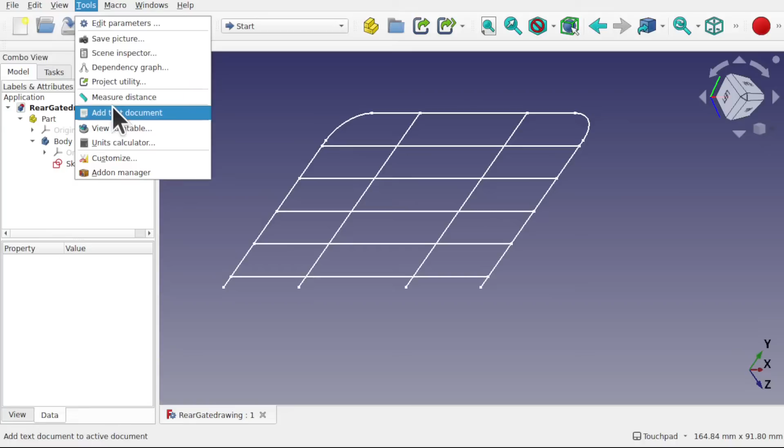One thing I'm going to do is take this, because I'm going to pick out some key points from this email. And I've got the file already open. So this is a file from the Patreon. And one thing good about FreeCAD is you can go Tools, Add Text Document. And this keeps the text document with the file, so you could put your design intent here, some project notes, etc.

So what I'm going to do is look through, and we're going to remove the background and focus on the key points. So we've got 2mm pipe all around. This one I feel is quite important as well, and there's a reason for that, because I've looked over to the left and I've noticed we've got this in here, a part. I'll come to that in a minute.

So we like to 3D print as usual. The frame is made from, so I'm going to take that as well, another design intent. And we'll take this one as well. And from that, we've got some notes here. So we can save that as well. Just save that off, we can rename that as well. So this is a design intent, so I just rename that to design intent, but we can leave it for the moment.

Now going back to the part, it's quite interesting because at the moment we've got no padding or piping in here, and it's a part design. So we've got a body here, which is a part design object. If I double click on that, we go straight to the part design. The interesting thing is this part here.

Now, I don't like making assumptions. That might be there for a reason. There's normally no reason to place a part, then a body inside, but it does create a separate container that you can do things with.

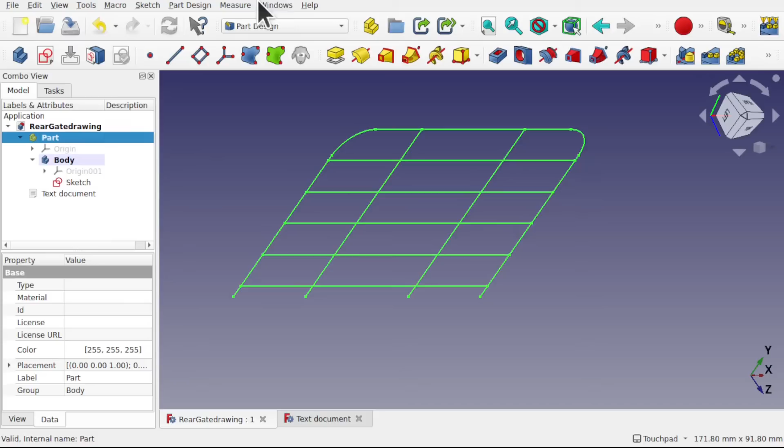For instance, let's come over to the draft workbench. Now, if you're into your laser cutting or actually multiple 3D prints, so laying out multiple 3D prints, and say, well, from our design intent, we can see here we've got, I use this as a technical drawing template to make rear and front gates on trailer.

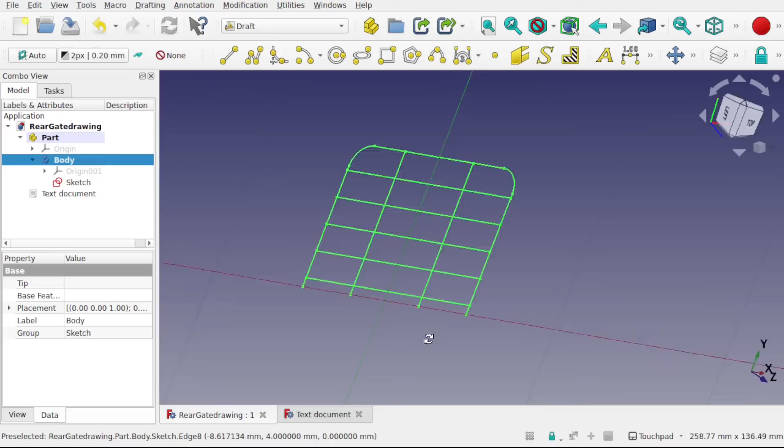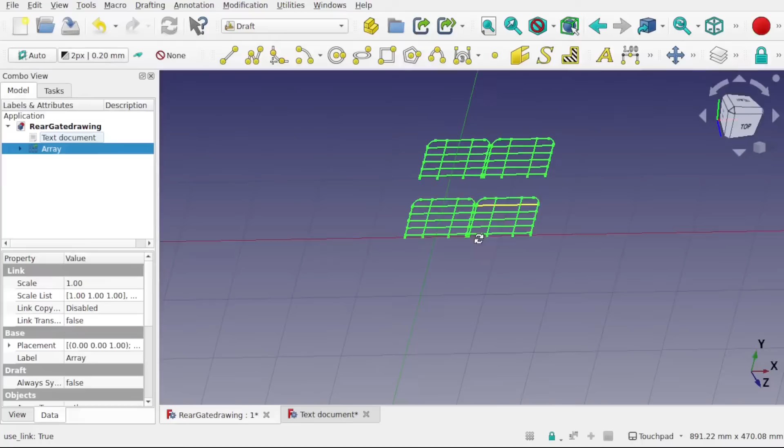Well, we may want to print this twice. So rather than duplicating up in your slicer or some other program, what we can do is click on that part, come to modifications, come up to array tools and array. Let's go by 2 on the X, 2 on the Y, and OK that. And we get an array of that body, so inside that body we've got array of the part.

So you can do things like that with the part container. This part container lives here, and it's available from this toolbar on all projects, so it has some use in that area. Also, let's just delete that.

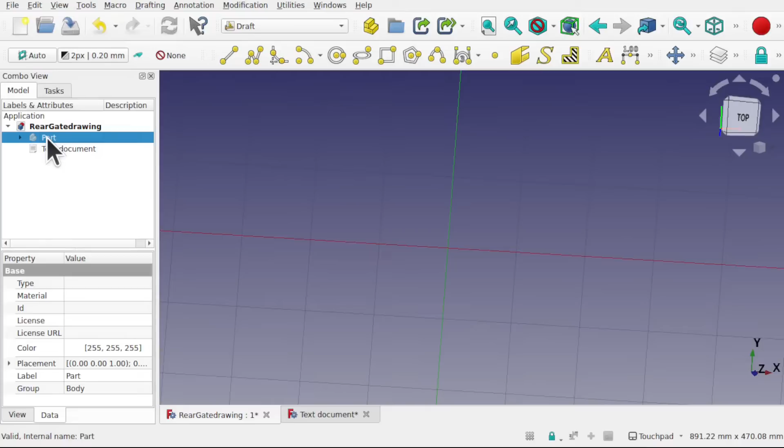And bring back the part. Let's come out, turn off the gridding, and center our view. So let's make sure that's visible. There we go.

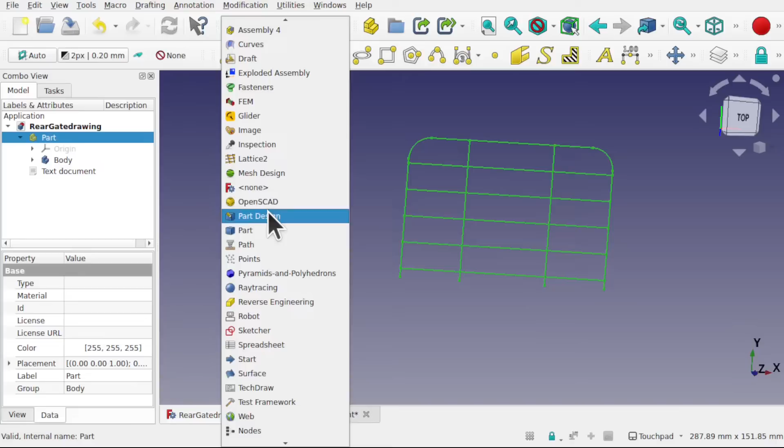This acts as another way of transforming. So we can transform this, and inside we have the body. So we can have multiple bodies in here over in the part design. So we have a new body, a new sketch, and I'm going to go along the XY plane and OK that. So now we've got two bodies in here.

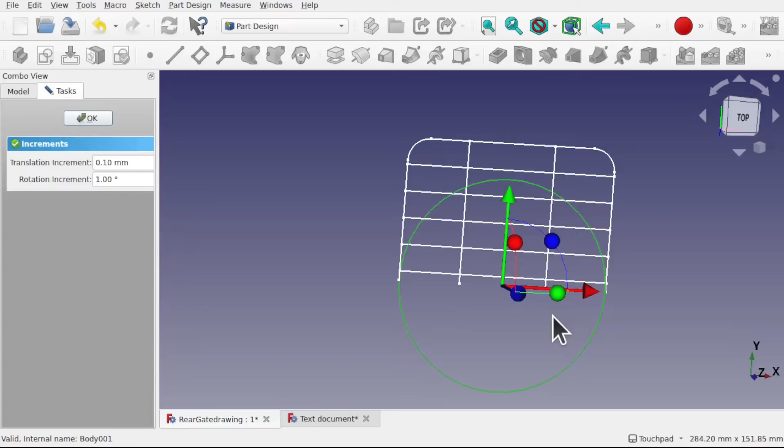So if I create a circle in here, they're going to be on top of each other. And I'll transform that body, right click, transform this over to the right. Let's zoom out a bit. Might have done this a bit big. And OK, so we've got these two bodies here, body and body 001.

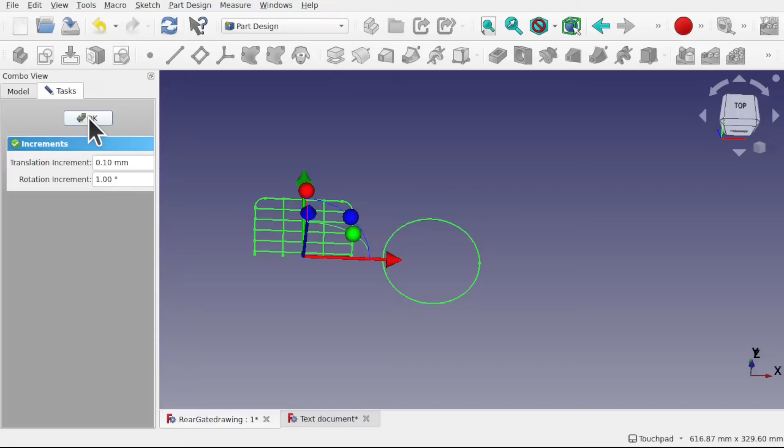That means if I click on this part and right click transform, I transform those as one. So it's a container to place extra containers in, and you can nest them in there. So that might be there as a design intent. If it's not, what we can just do is delete that, and it's saying delete contents as well. We can just hit no.

So for the time being I'm assuming that it's not there for design intent, but if it is, we can just add it in. I don't like assuming, but we're just going to assume that for the time being. So we have a body, we have a sketch. Now let's have a look at the sketch and see what's inside.

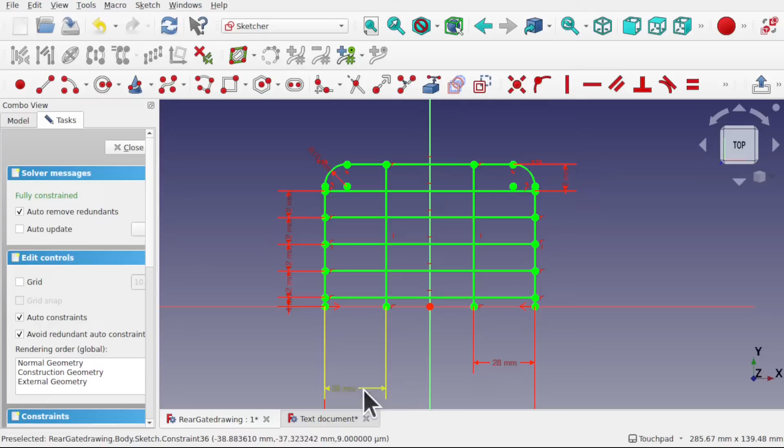So we have a basic sketch in here. We've got a number of constraints to place this 12mm apart. What I'm looking at is, if we look at the sketch, we have symmetry across here. And we can see all of these are the same going along here. So we could save ourselves some time by sketching only half this side.

But looking at the design intent, there's this bit about the technical drawing. So if I was using this technical drawing, we can actually use sketches in technical drawings. So let's come over to the TechDraw.

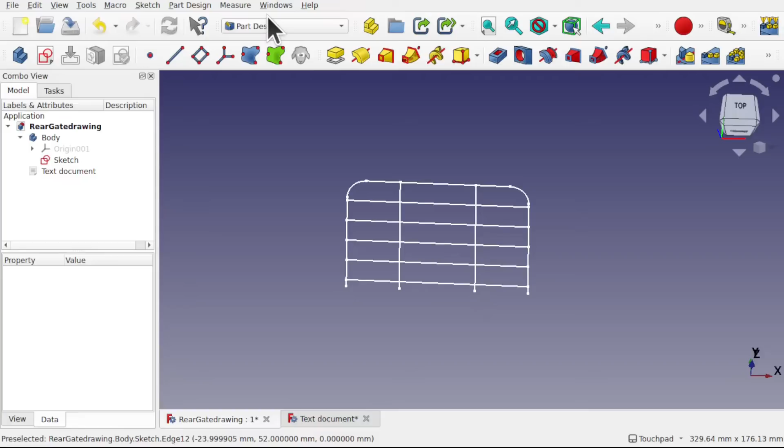So this is where you have to be careful with symmetry. If I was only doing one side, we would have to do something extra with the technical drawing. Let's go to TechDraw, and we'll create a new technical drawing document. Not worried about the pages at the moment, or what we're using for the template.

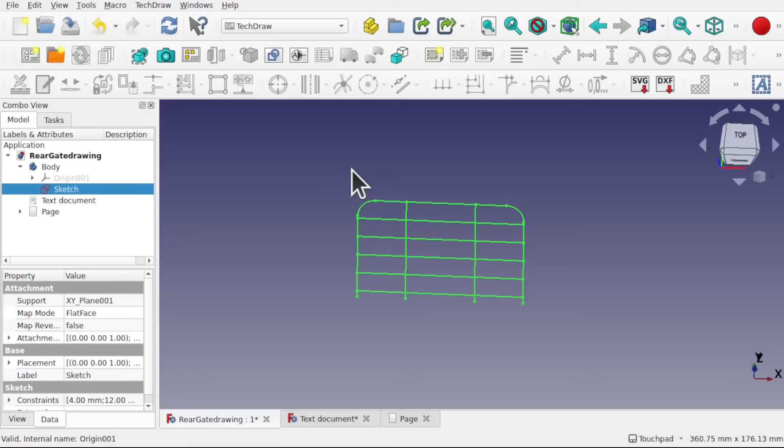And what we do is click on the sketch, so we select what we want in the technical drawing. Make sure our view is nicely placed, and we use this button here, insert view, or TechDraw insert view. That inserts this view into the technical drawing. So when I come down to the page, you can see we've got this in here.

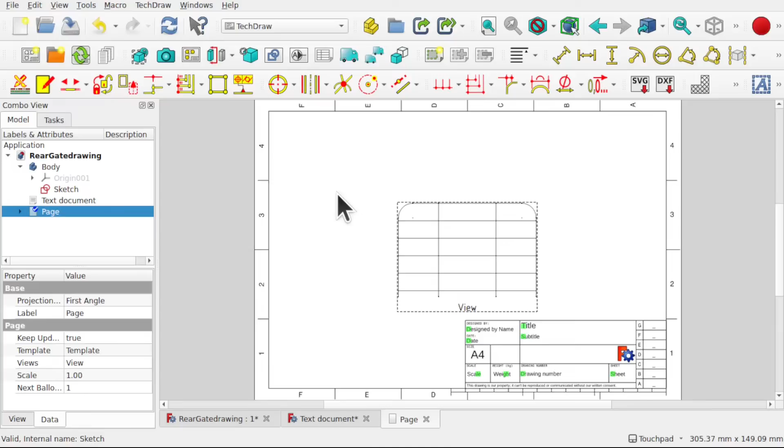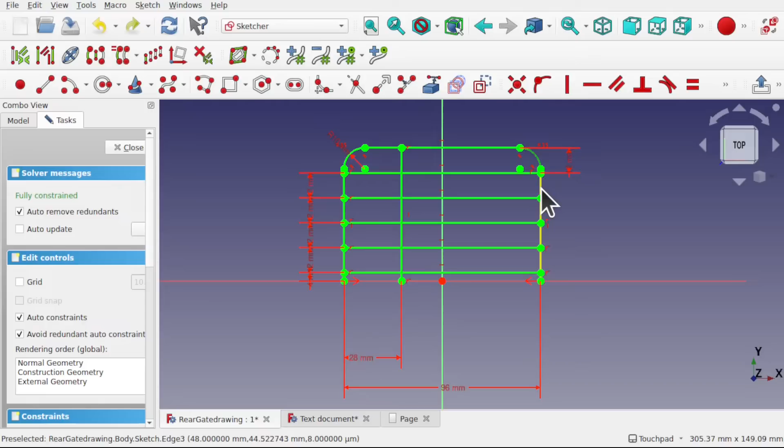If we was doing this with symmetry, let's come back into here and just delete that. If we was doing this with symmetry, then we have to be careful, because obviously if I come into here and let's just delete this one, and we'll delete these sides as well. So let's take these, select those two and delete. And we'll bring these back onto this line with a point on object constraint.

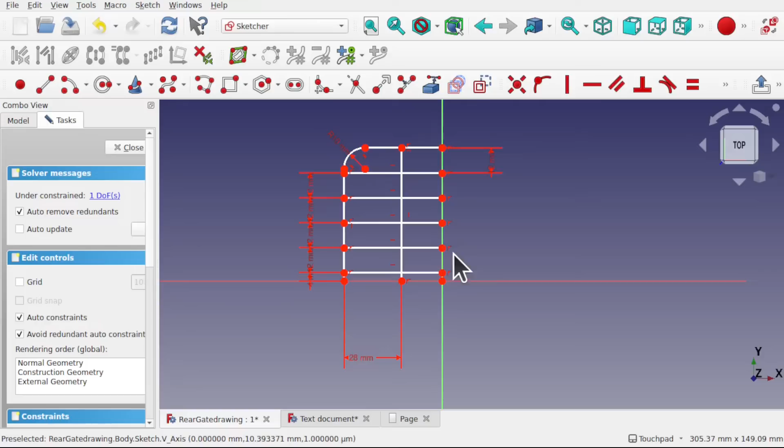So we can multi-select these. Select 3 of them, 3 points, and click on this line, point on line constraint. So it takes all those 3 and places them on the line. We've got that there, but it's obviously not fully locked down as of yet.

So we can take a length in here, place a length constraint, 20mm. Okay, we've got some additional constraints in here, so we've got this 12mm going all the way up here. These are all the same, so I'm just going to delete these, leaving one, and then take this one here.

Now I see that's a single line. So what we can do to save our constraints, we can change that into a polyline. How's that constraint in there? Okay, that's good. So I'm going to delete this 12mm, remember that, and also we want the 4mm there.

So I'm going to sketch by the side of it. Come into the polyline and we'll place one there. The polyline will allow us to do what we've got in here. It just neatens up the sketch a little bit. So we've got those in there.

So we want the 12mm, this one's 12mm. And we'll make all these equal, so selecting them all, making that equal. And also we've got the 4mm here, and we'll set this one to 4mm as well.

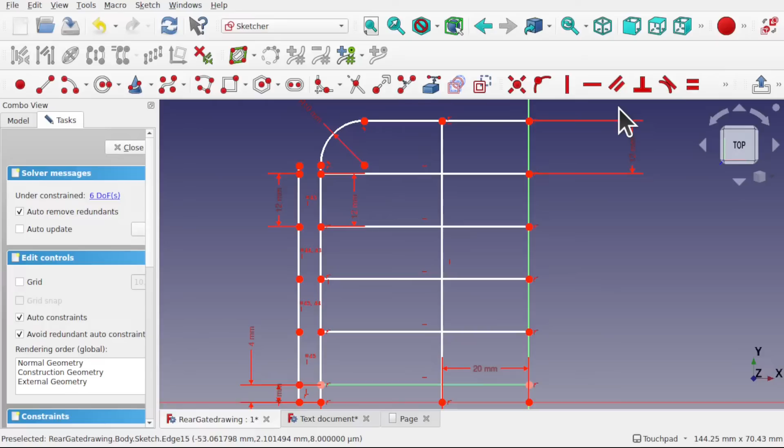Therefore we can delete this. Let's first have a look, see what distance. So this is 28mm, so we must remember that. Because when we delete this one and connect up these constraints, this should be on the line, point on line constraint. Some redundant constraints there, let's delete that. Might have already been on that line.

And these need to be coincident. We can't do multiple coincident constraints, unfortunately, so I'm going to use that. I'm going to actually speed this up by taking these two and pressing C on the keyboard for coincident. Just connects those up. Finding these two, and then placing, I believe it was 28 millimeters there.

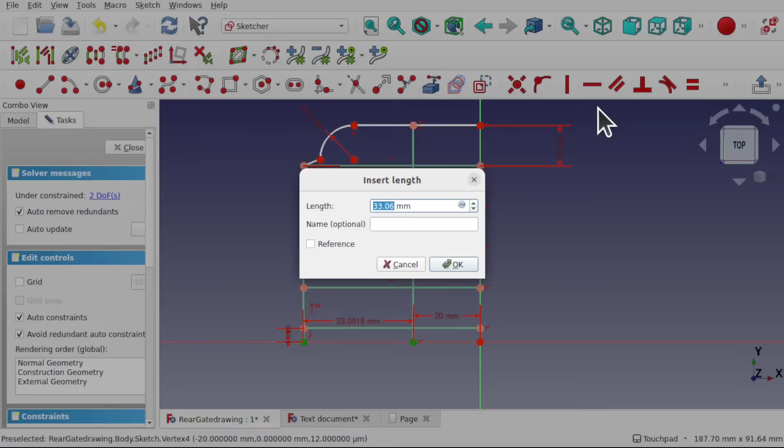We've got some constraints still to sort up here, which means that this one just needs a vertical constraint. And I've missed the length in here, not sure what that was. Let's just place that in there, of 2mm. There we go. So we've got that there, all constrained down, all ready to go.

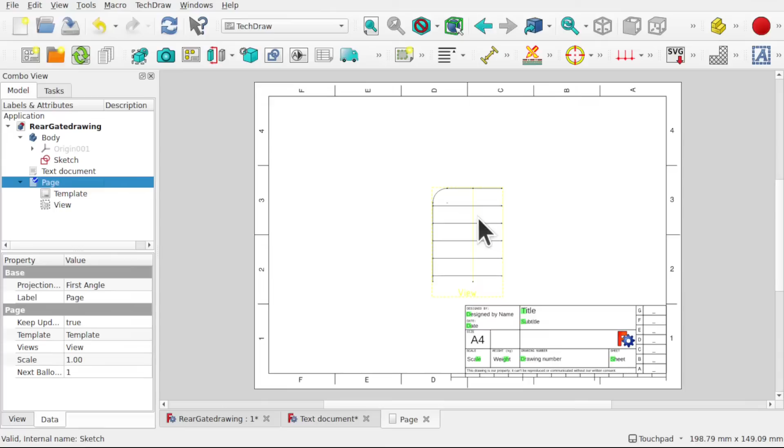When we go back to saying we want this in a technical drawing, then obviously we haven't got the other side. So when we add that with our insert view, we only get one side. But we can solve that. So let's delete that view and come back to the body. I realise I haven't actually answered any of the questions yet—this is just some background.

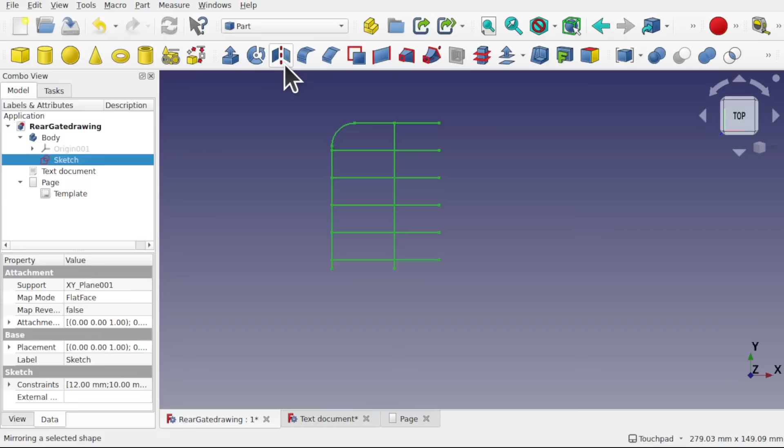In the part, we can mirror sketches as well. So I could mirror this sketch using the mirror. I know it's a part design workflow we're doing this with. We can still jump into the part and have parts using the part workbench, and have those separate from the part design. So we'll mirror that over the YZ plane and okay that, so it's mirrored over the other side.

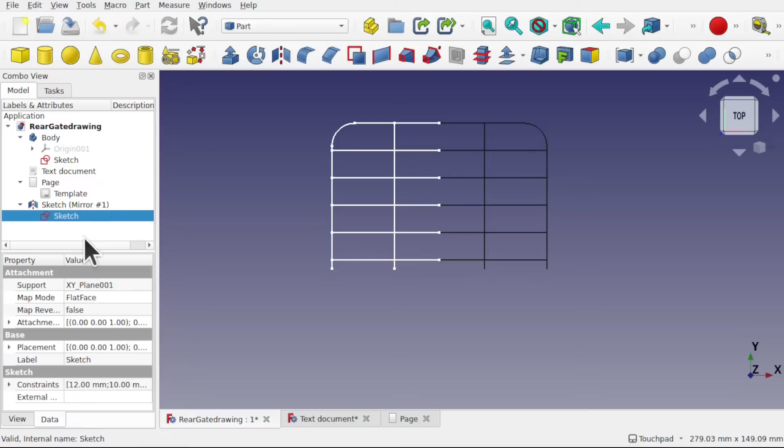When I select both of those, so we've got in here, we've got the sketch. If I click on this, this is actually this sketch here. So if I press the spacebar in here, the other one disappears as well. So these are linked. So if I control click both of those, first of all, we'll go into the TechDraw and then do insert view.

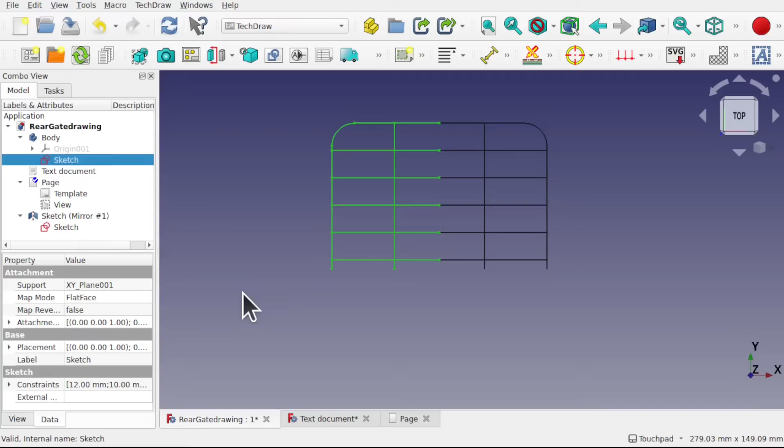If we look at our page, we get both sides actually inserted into that view. Anything that happens to this sketch, because they're linked, will get reflected in the mirror. So we have that option there. That means that I can come in and just hide the sketch mirror and work with this body up here. So we've got the separate mirror for our technical drawing if we want to keep that gate inside our page.

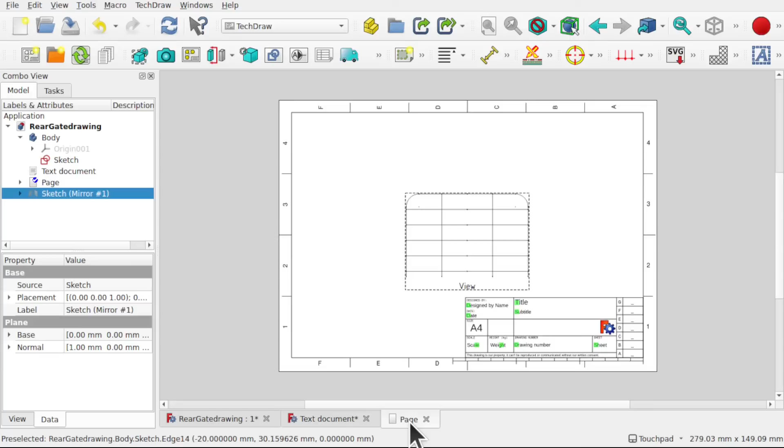So going back to the question, let's come back to the part design. First things first is make sure that that body, right click, toggle active body. If it's not bold, it's not active, so we need an active body. I need to place a profile to sweep around here.

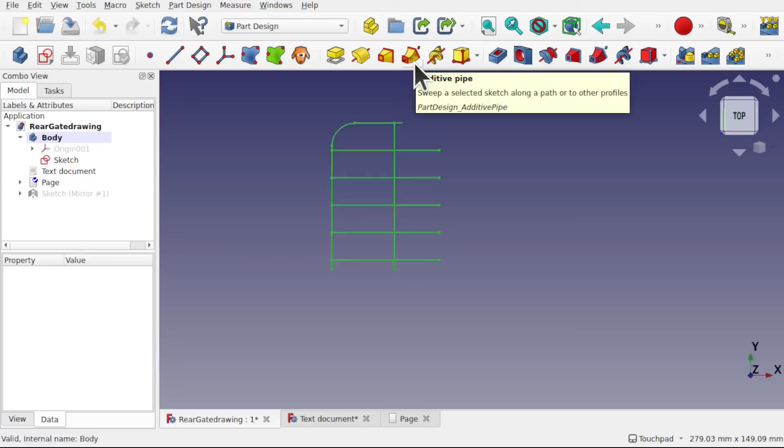Now we're going to use something called the Additive Pipe. So going back to our design intent, we've got frames made up from 2mm pipe. So straight away we can relate to what's in the part design for the Additive Pipe.

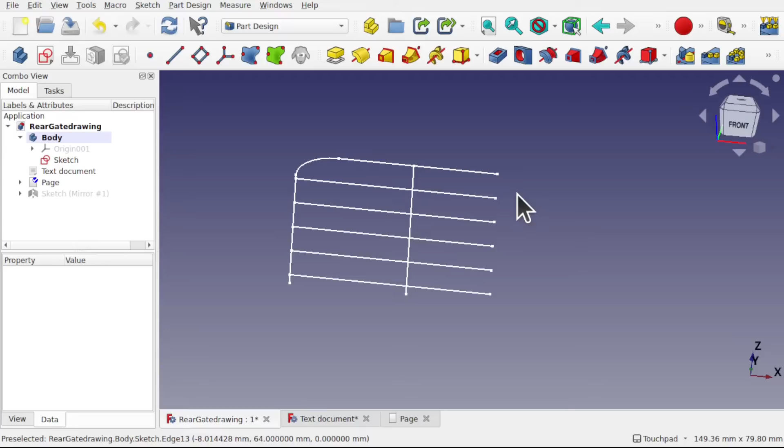Best idea with this is to use an attach mode called Translate Origin. This allows me to target these vertices. So we go around to our front and create our initial sketch. Make sure nothing's selected and create a sketch, looking along the XZ plane. Come down to XZ and OK. Now this will place me in the right position, so I want to place a pipe around this part first. Let's go for a circle and create a circle.

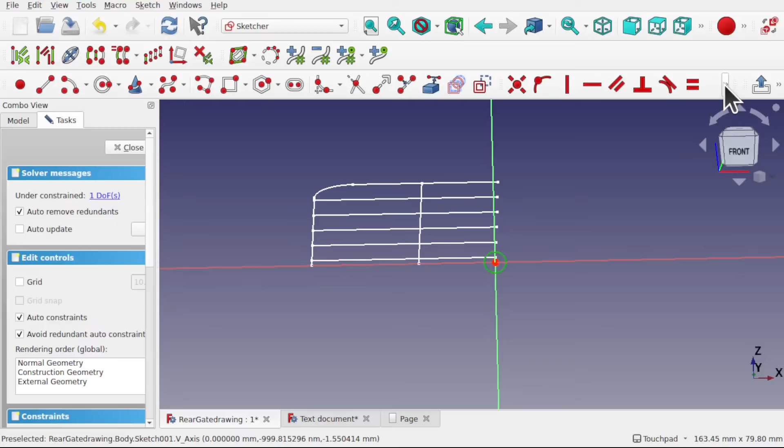Now this was 2mm, wasn't it? So we take the circle and come up - I've cranked the size of the icons up just to make it easier for people to see - and we'll set a diameter of 2mm. This profile can be whatever you want, so we could make a square for a square pipe, but we're just going to go for a circle for this one. I'm not sure what piping we want around here, but this profile can be changed. Now let's close that.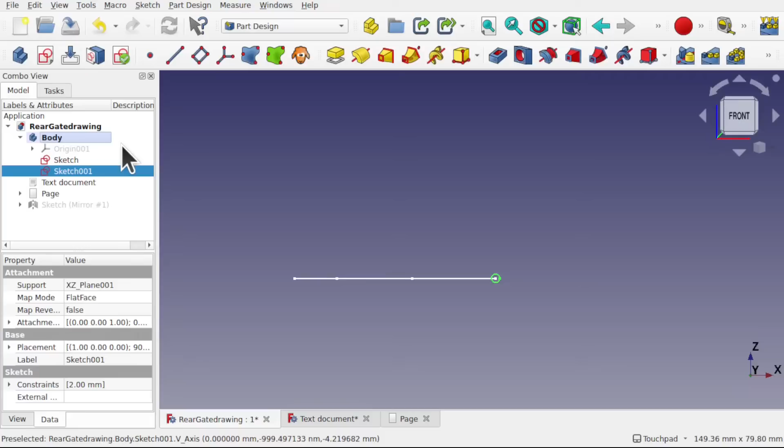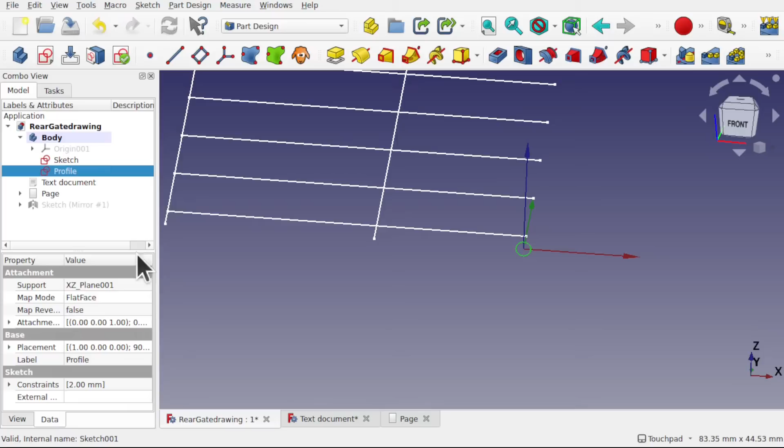At the moment the circle sits in the middle of the origin here. So if I come up to view, toggle axis cross, you can see how it sits there. This is where sketch attach mode comes in handy. So we'll take the profile, which is this one here, and just do a quick rename on that for profile. We can see the support is the XZ plane and map mode is flat face.

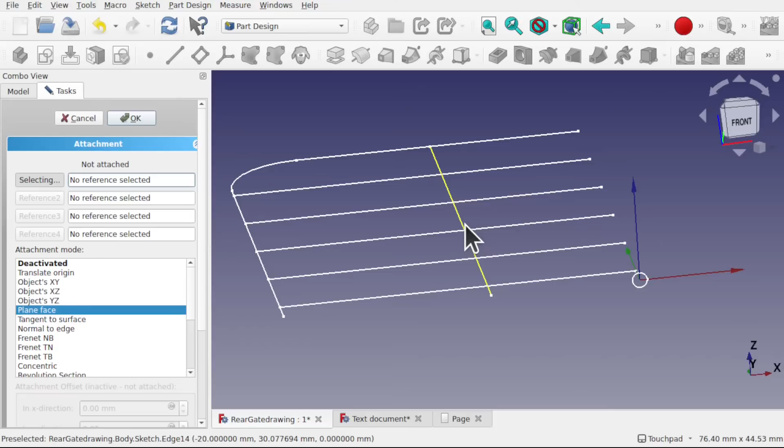So we click on that and we can see our attachment modes. Let's move our screen over here. I'm going to click on plane, make sure it's saying selecting. We'll remove the contents so we've got nothing in there. The profile is projected this way, so it's sitting pointing across. That means we can use the selecting option and select this vertex, which moves that profile to that vertex, ready for the sweep or the additive pipe.

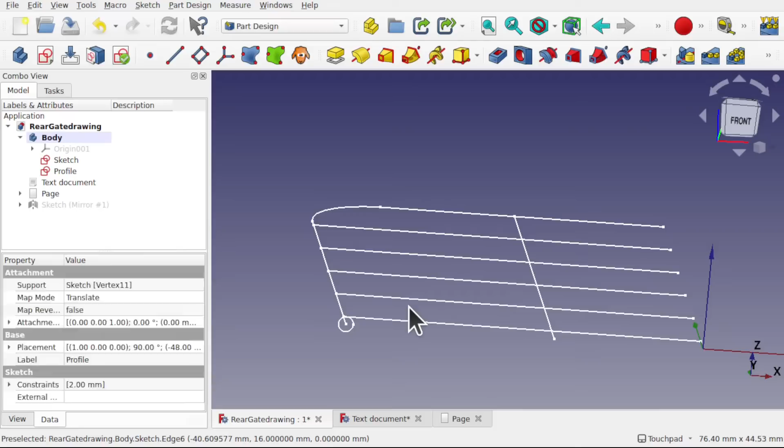So now we've got the profile in position. I had a tick on, so I just went Edit, Refresh, or Control R on Linux - it's different on Windows or Mac. So we've got our profile ready.

What we need to do now is use a sweep. So Part Design, create an additive feature, and it's the additive pipe - this one here. The first thing it wants is to select a feature that we want to do; this is going to be the profile. So we'll select the profile and OK that.

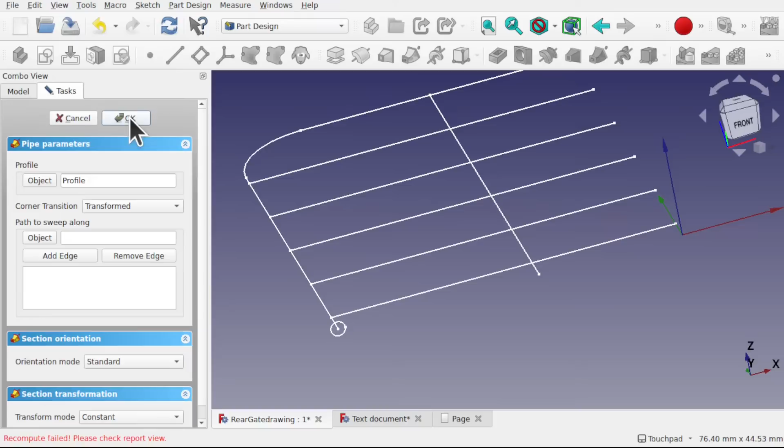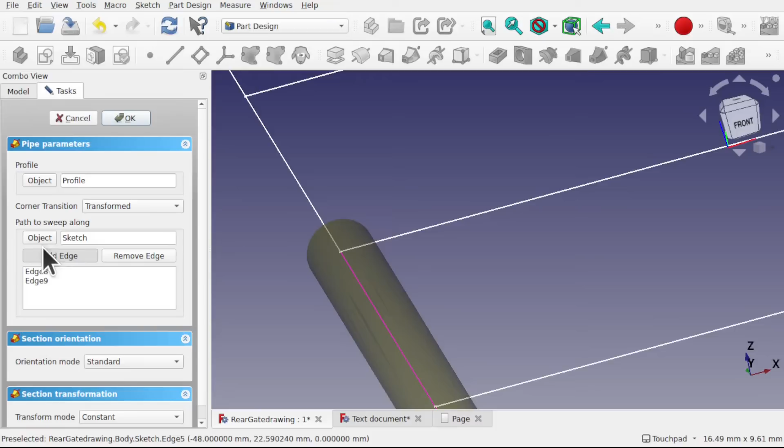Now we need to add the edges. So click add edge and click the edges. These are going to be the individual edges here. So we'll select this one, and then we have to hit add edge again, unfortunately, and select this one. Unless it's changed, let's select one again. No - so add edge, and what we're doing is moving along, adding those edges.

And we create this pipe that runs all the way through. Now be careful here - I'm just going to zoom out a bit and bring this around. And if I highlight that line, I can use my zoom and it will target that into the center. There we go. So add edge again.

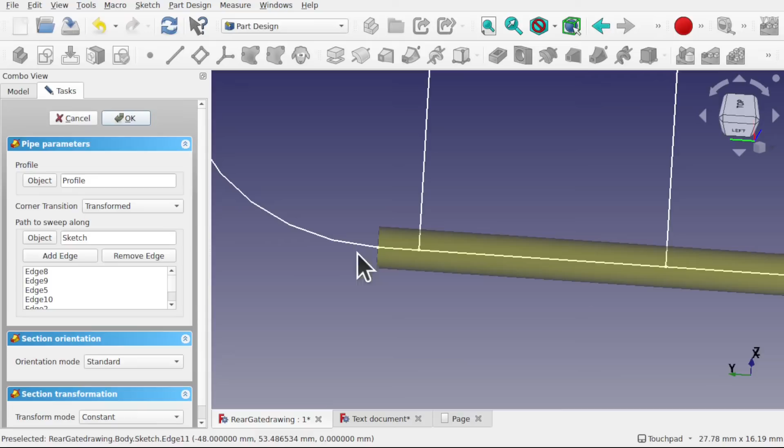And we shouldn't have any transition problems - it should go nicely around there because we've got a nice curve there. And we'll add an edge again there. So we've got the first part of our pipe that goes around the outside. That's okay, that - so we've got that one there.

Our sketch disappears, which is fine because we can come into the additive pipe and look at what we've got in here. So we've got the profile, we've got the sketch - click on the sketch and press the spacebar. So we've got that now.

Now we can do the same with these lines here, or we have another option, and that's to use a transform - so we could do one and then transform that across. At this stage we've also got the option to use different profiles, so for instance I could use a square profile for this one. But we must make sure that they all connect up to the same object in the end.

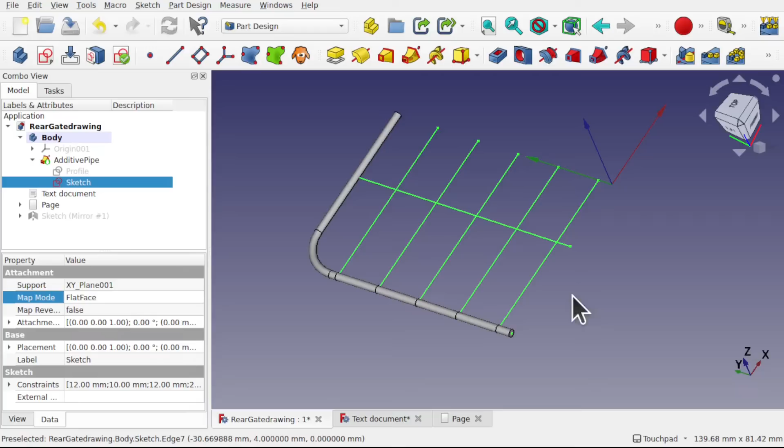So let's see what happens - we'll create another sketch. If I haven't got anything selected, create another sketch. Let's have a look at our plane. So we're going to go from this side, the XZ plane, and I want to target this point this time. So nothing selected, new sketch, XZ plane, this one here. Create the sketch.

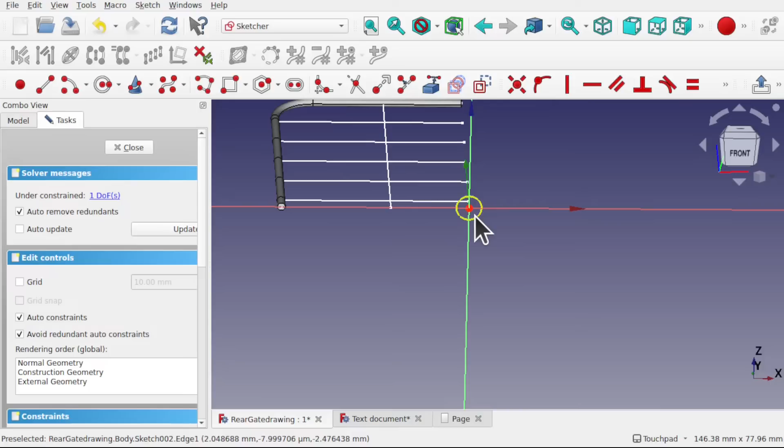We'll keep it the same - we'll use a circle in here. So we'll come into here. We could copy the profile if we wanted to, but I'm just going to do it this way. I'm going to set this to 2 mil.

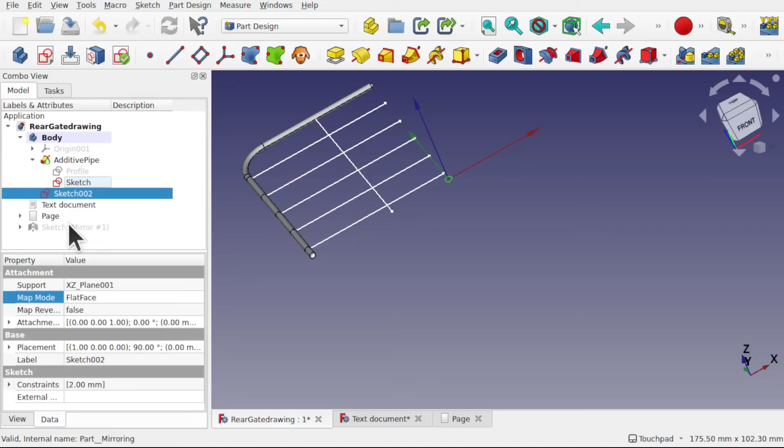Close that. So we've got our profile there. Again, we're going to take that sketch and move it to this point. So come into the map mode for that sketch, click in there, the button on the end, clear out the contents of this field, make sure it's saying reference 1, and select this vertex. Make sure the button's saying selecting as well and click the vertex. So we've got translate origin there.

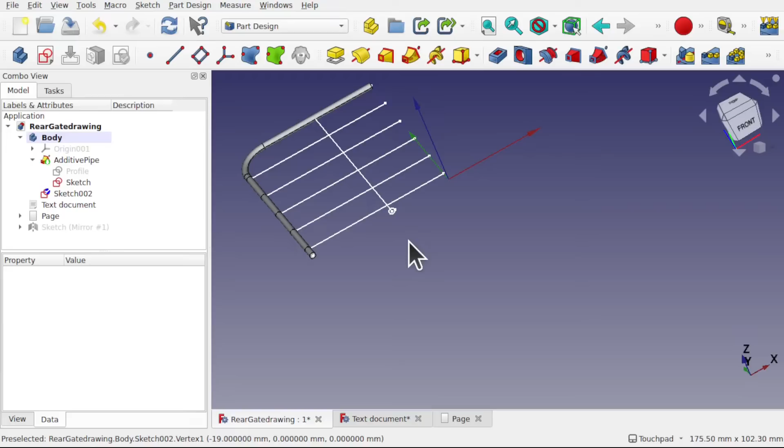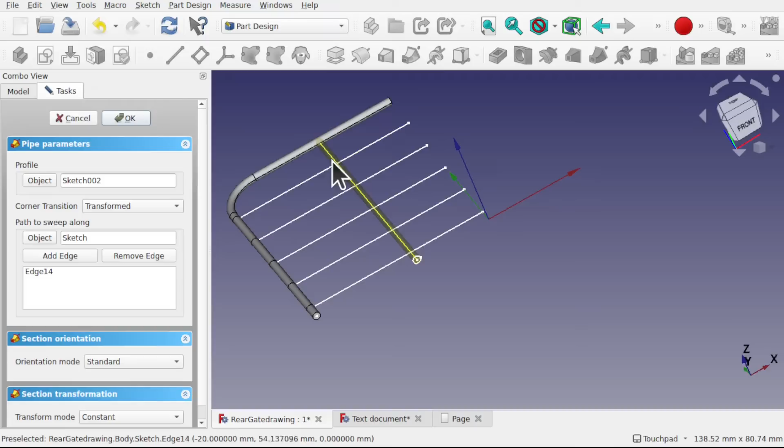Okay, that. And now we'll create the pipe. So we'll select the sketch this time, so it's already selected. That means when I do the pipe, let's take the pipe from the toolbar, the additive pipe. It's already got the profile in there, so let's start adding the edge. And let's select this edge, like so. And that connects straight up to that one. It's got to make a connection, otherwise it's going to make a multi-body object. And hit OK. So now we've got, as well as a nice connection to this part here, we've got this part.

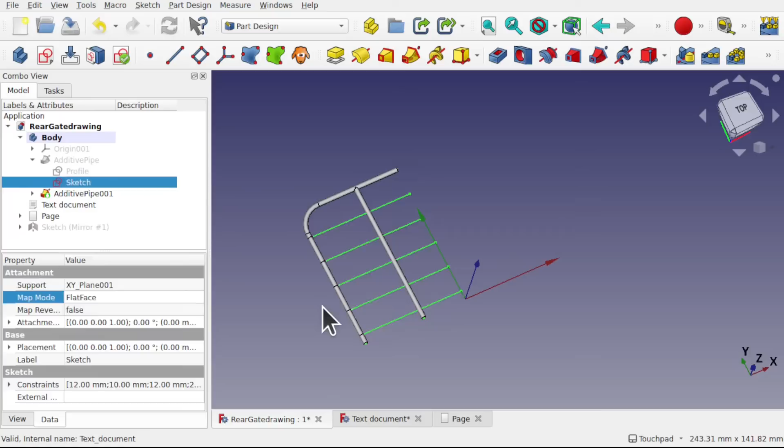Again, the sketch has been made invisible, so we can see that sketch there. And it's just a case of repeating. So let's come around to this side.

And the axis we're looking for to start with for our translate origin is the ZY. Or the YZ, always get them around the wrong way. So let's create a new sketch, make sure nothing's selected. The YZ, and OK that.

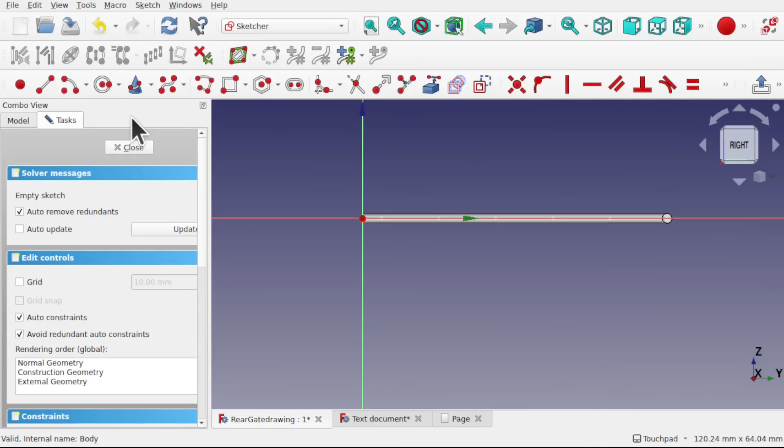This time let's create a circle. Let's change the size this time. Let's create a smaller diameter on here. So the diameter is 1 millimeter. So we're just doing 1 millimeter for these ones, these runs. Close that and we can see that profile is sitting there. So click on it,

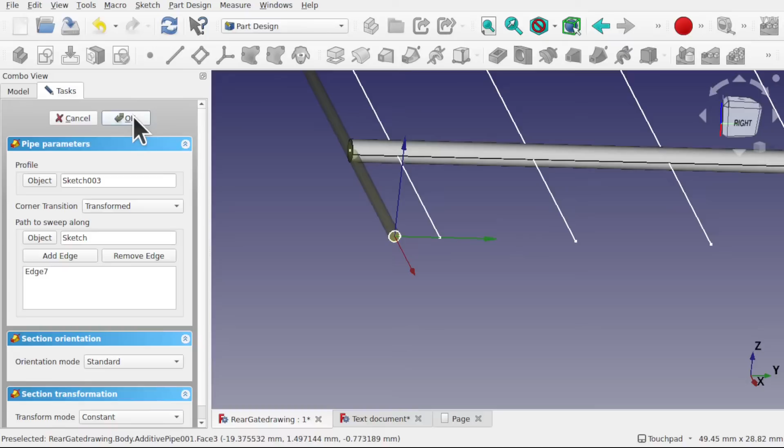create the additive pipe. Let's cancel that, we've missed a step, so we need to move this first. Otherwise, let me show you what happens if we don't move it. So click on it, additive pipe, add edge, this one, and it goes from whereabouts it is. So go from there. If we do get this, what we could do is hit OK.

What we can do is come into the additive pipe, look down, and we see where it's connected to. So it's connected to the profile sketch 3. Come into this additive pipe and we'll find the profile in here, sketch 3. So this one here. See, the support is still the YZ plane.

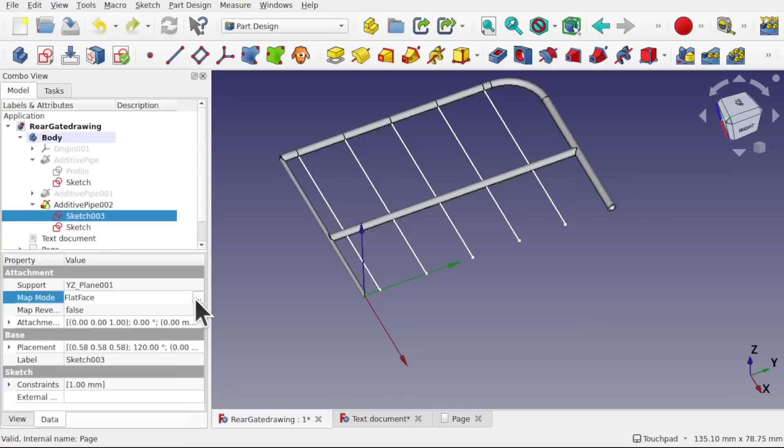Map mode, flat face. Let's take that, clear out the plane, make sure it's saying selecting on the button, and then we can come in and select the vertex. When I OK that, looks like it hasn't done it. We can see ticks are in here, so we go to edit, refresh, and it moves into position. So it needed to be recomputed, and that moves into position.

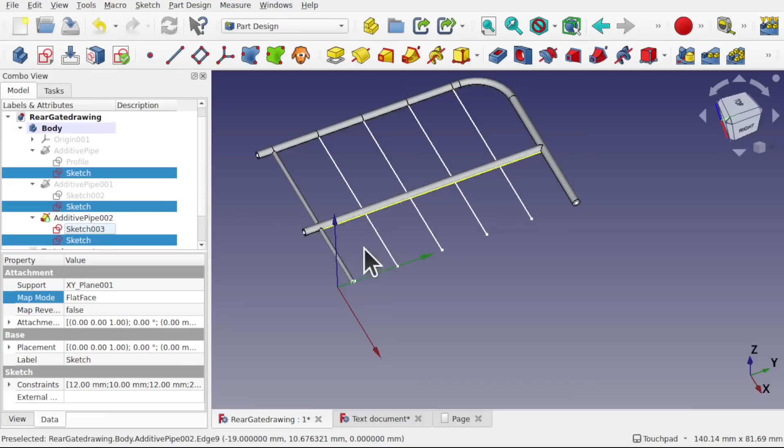So for the next ones, we can carry on with the same process of adding a circle and creating the other pipes along here, or we could use a transform. So for that, I'm going to take the feature, this one here, come up to part design, apply a pattern and a linear pattern.

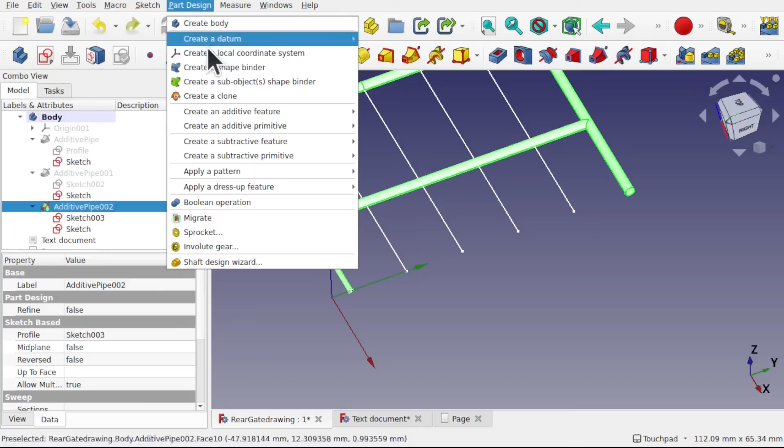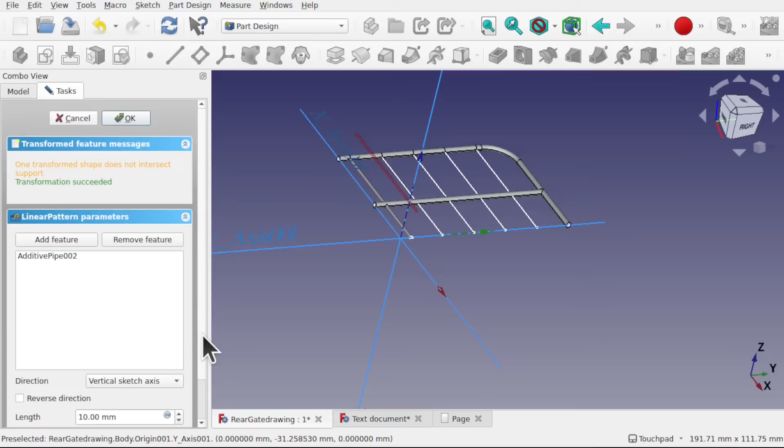At the moment, it's saying vertical sketch axis. Let's change the length so we can see what's happening. So I'm just going to go 10 mil for the time being. So when we do 10 mil, we can see this red bar is here. So we can see it's on the wrong axis at the moment. We only got 2 occurrences, so let's set this to 4, so we can see those there.

Let's change this to horizontal sketch axis. And we get those bars going across like so. And we can change the length. So here we've got 1, 2, 3, 4 occurrences, which is right. And then we can set this to what we want. So 25 mil, forget what it was, 50.

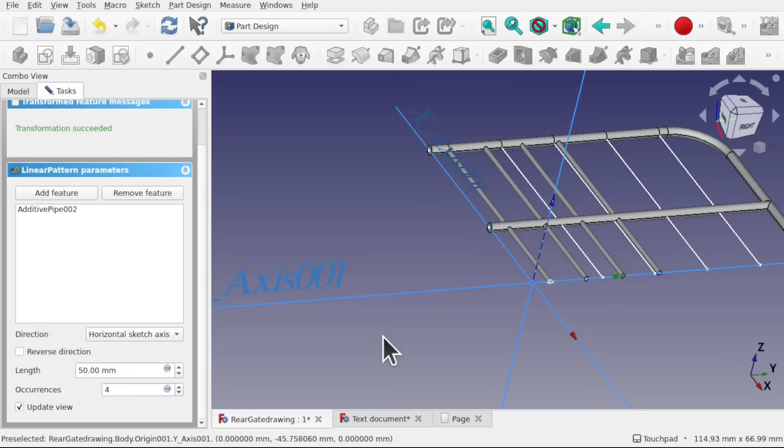Let's pull this back a bit, so it's whatever we want in here. Let's go for 45 and I'll hit enter. That's the problem - if we get this, we hit enter, we can reduce this down and use Control R, or the refresh if we're in Windows. I've just done 4 there.

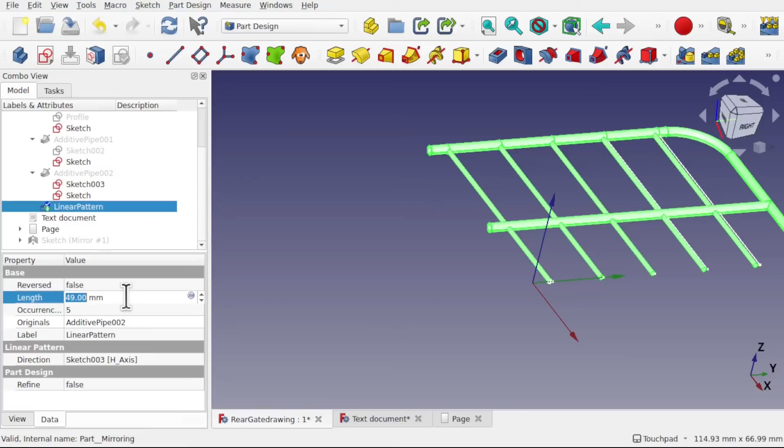Let's do 5 occurrences, and let's increase this, and we can place them where we want. So 49mm across it, and we get our grid.

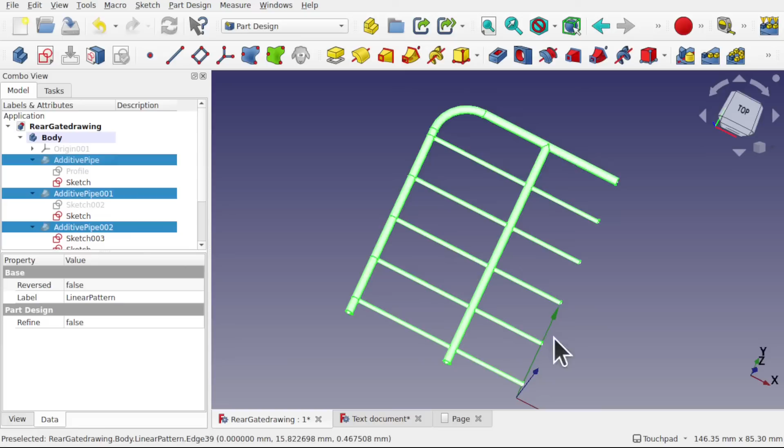So I know we have this body, we could mirror this over to the other side, say in the part. So the final part will be coming to part, and then using that body in here and doing the mirroring from this, or part mirroring.

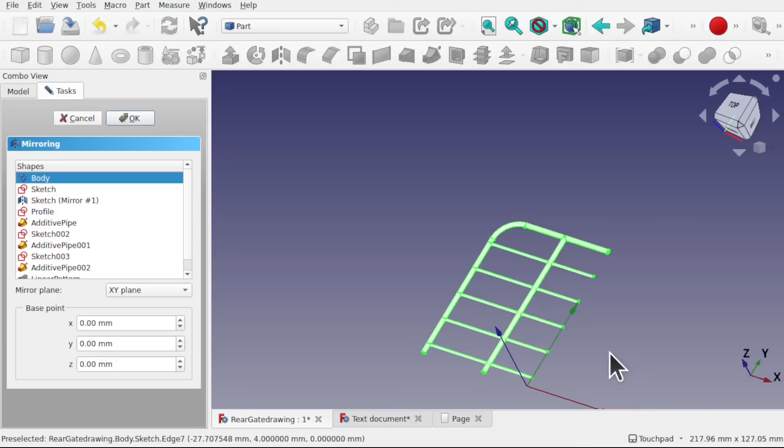And sometimes it's quite awkward to figure out what plane. So over the Y and Z - we're jumping over this plane here, so I want it to mirror over here. So we come in, mirror YZ, and okay, that mirrors that over to the other side, like so. Therefore we've got the body mirror, but remember that we need to fuse these together.

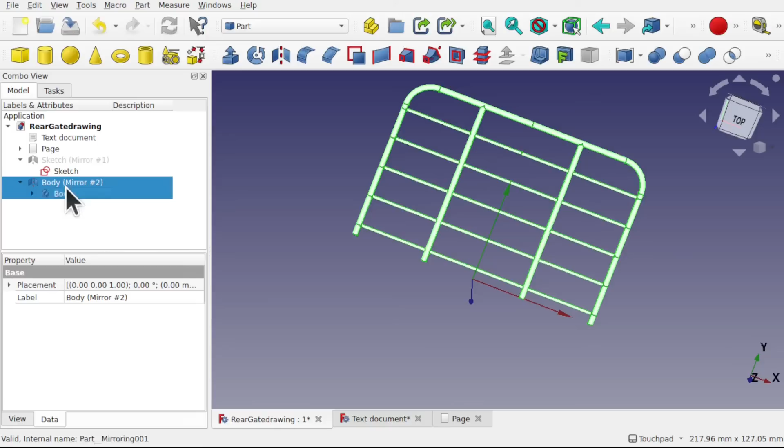So taking these two, making sure we control click them, we can fuse them together using the union - that's on part and Boolean union. Or we could actually not even bother with that and export both those parts out as an STL. So take one, control click the other, come into that body mirror and select the body within, then come up to File, Export, and that will export both of those at the same time. We just select STL mesh there and save that off.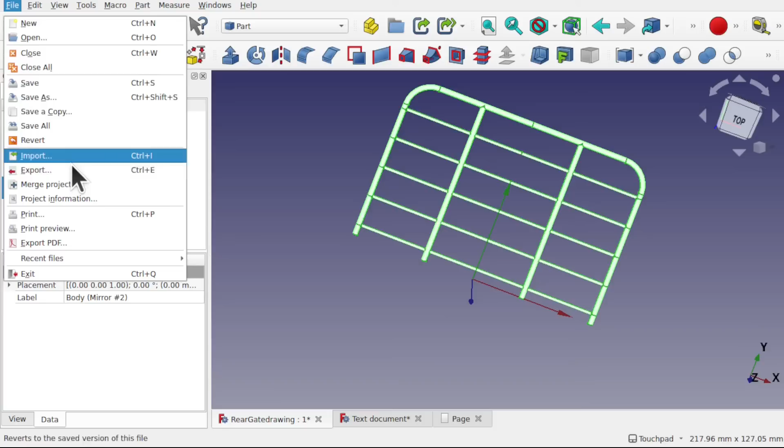We did a file import now and look for our gate. There we go - we have the rear gate there, so that is all one body with 2 components in. So it's up to you if you want to fuse those 2 together.

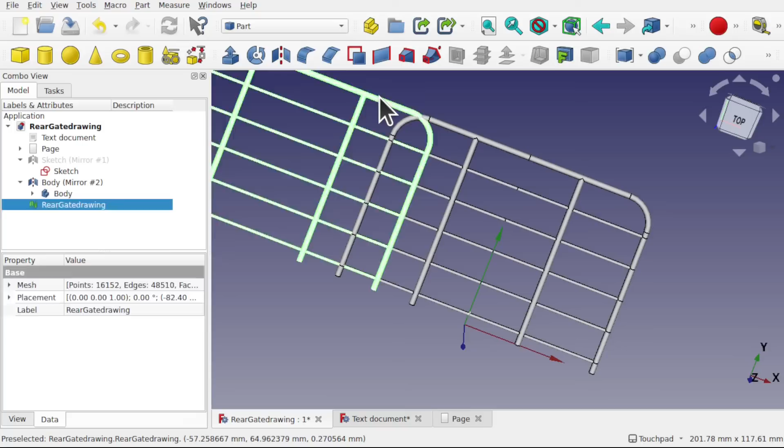Now, if we didn't want to do this via the mirroring, let's take it back a level to where we started doing the mirroring, and we want to keep it all in the part design. So what I've done is I've gone back to the point where we had these 2 additive pipes. I'm going to show you something that you may not realize with this model.

If we look at the model, we have these lines. Now, these aren't deviating from the normal along this line. So if we think about it, we don't need a sweep - we just need an extrude. So if we place a profile on here and extrude it, we'll make these connections.

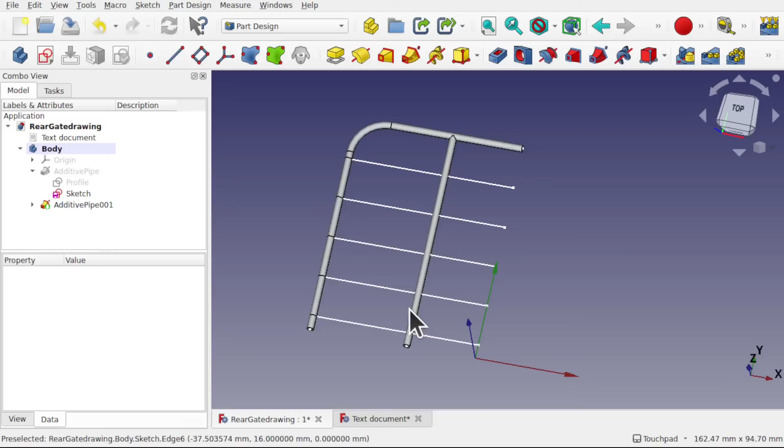Therefore, let's come around to the YZ plane. And this will allow us to mirror because we're not using any patterns or anything like that in the part design. Let's make sure nothing's selected. Create a new sketch, YZ plane, okay that.

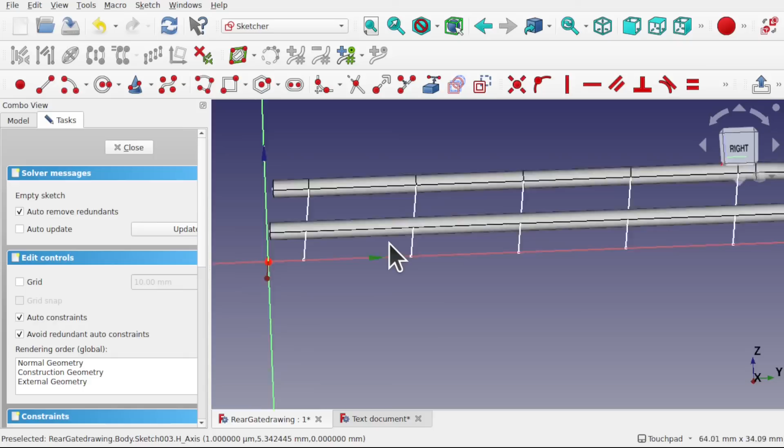And place a bit of angle, and let's bring in all these points. So I'm using the external geometry tool here and pulling in the points. That allows me to connect the circles on these points. Now I'm going to place the circles as 1mm again along there - it's up to you what you choose.

Connect up to that point, bring it out, and what we need to do is do it for all of them. So I'm going to do 1mm along here. We could use an array, I suppose - we'll just add those in. I'm going to hit escape, and then I'm going to select all these circles.

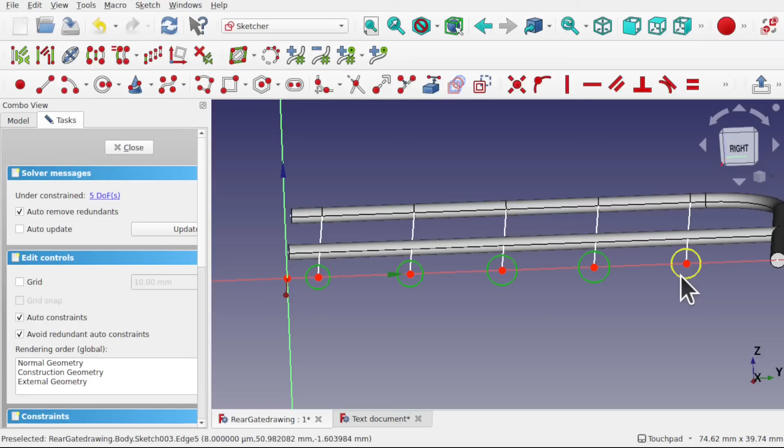We've selected most of them, and select those two, and use a constraint against there of 1mm. So we can just about see those in there.

So what we've got there, we can use an extrude. Make sure that sketch is selected and use the pad, not the extrude, the pad. Everything's going to disappear because it's not going all the way up to this point. If we look at the direction, we've got sketch normal, so it's normal to sketch. We can select a reference, select this line here, and we need to bring this all the way up. We're not sure what length this line is.

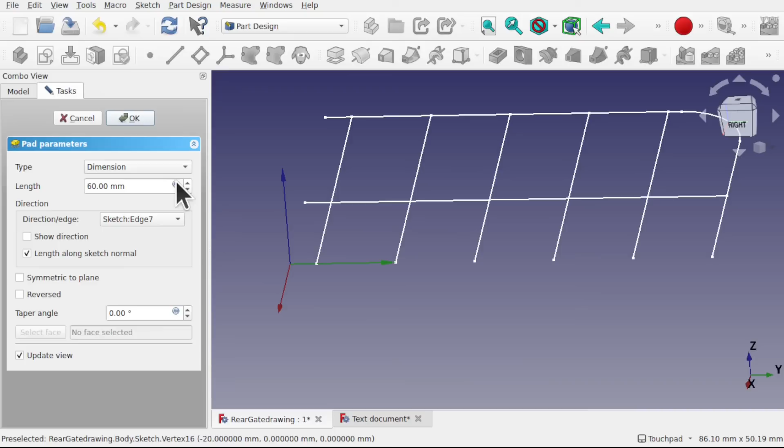So let's come in here and place 60. And we just go all the way up.

It may be that it's in reverse. Let's try reverse. There we go. Selecting reverse, it went the wrong way, so it went this way.

And that's bringing this down to the right length. Actually, we don't even need this, so we just use sketch normal in there. And we can move this down.

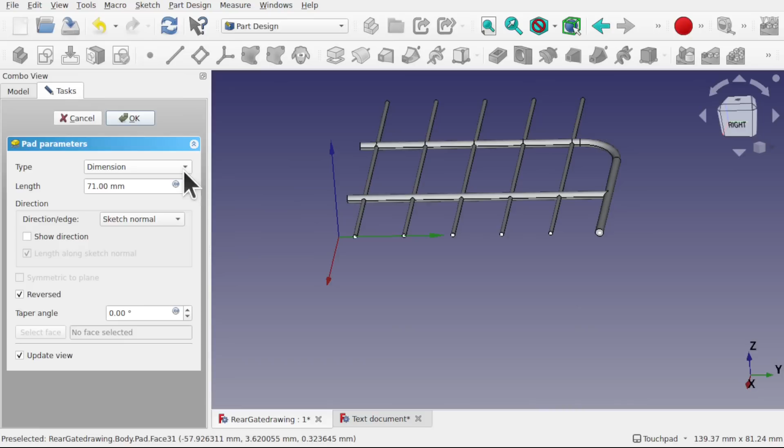So let's try 50. A bit more. 45. That sounds a bit familiar.

Because it's made the connection with this one, that means it's one solid object. So if you follow this, it connects to here and connects around. So this gapping doesn't matter. So that won't actually make a multi-body object because we already got this connection here. It's still one single body.

So 50 went all the way through. So let's go to 48. There we go. So that's in there now.

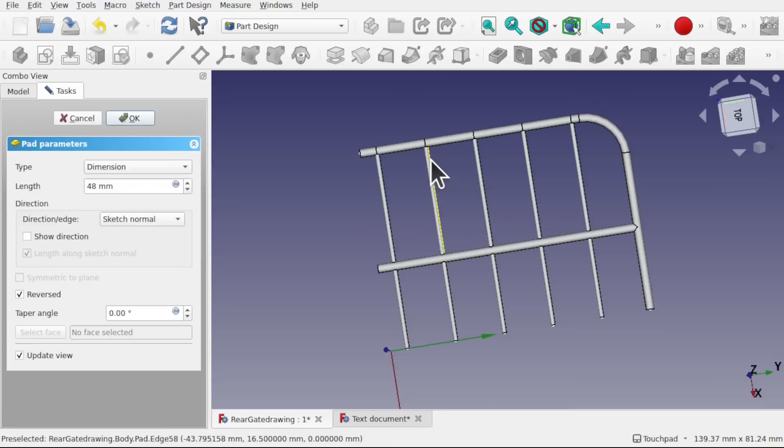Therefore, we've got no mirrors, we've got no patterns in there. So we can do our mirror now.

So let's hide all this. And we need to mirror the whole body over. So we need to select all of the features, the additive pipes and the pad. Control select all of those.

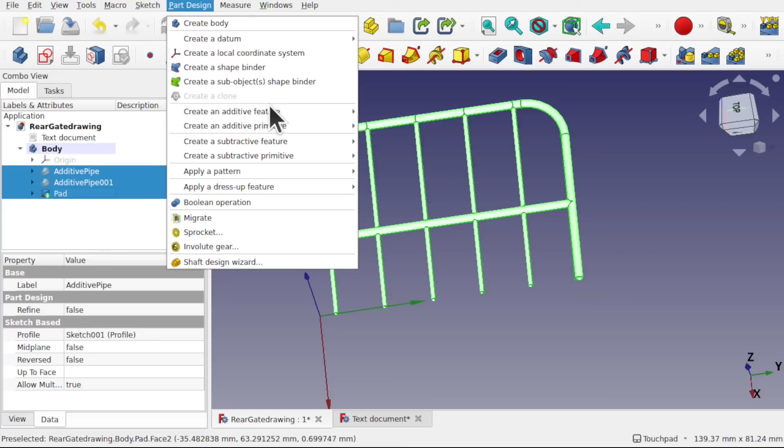And use the mirror in part design. And we create a pattern or apply a pattern mirrored.

And we can see the way that's mirroring. It's mirroring across this direction. So look at our axis cross. We can see that we've got the Y going this way and the Z going this way.

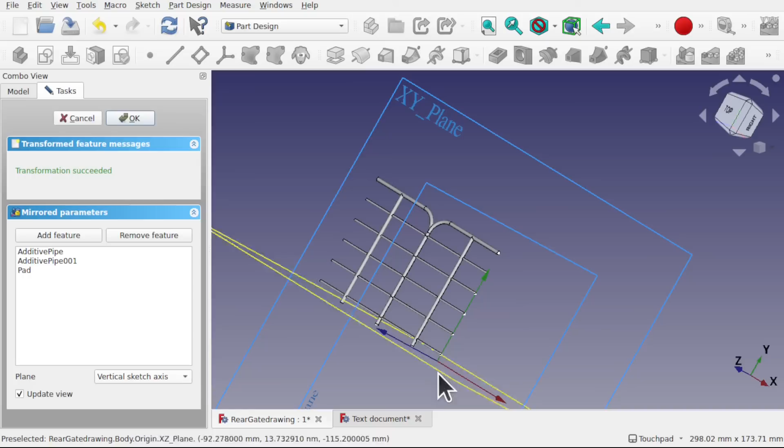So this is our base plane this is sitting on. So we need to mirror over the base plane. So we drop this down and look at the YZ base plane. If you're not sure what plane to mirror across, just try the ones down here.

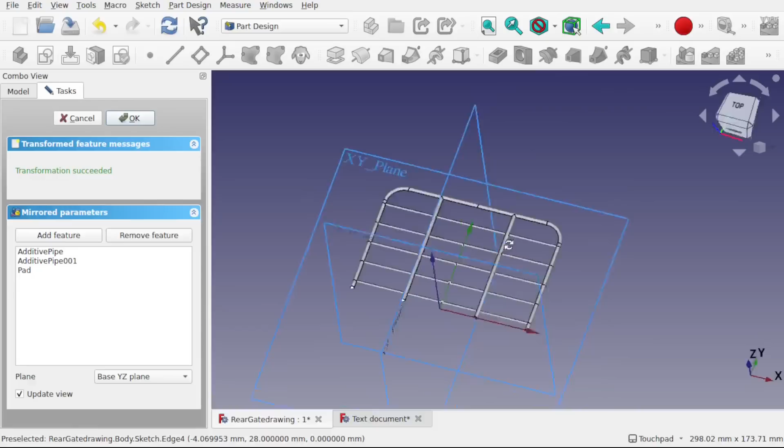And therefore we get our mirror all done in the part design. So we get a nice mirrored feature. And therefore we can take that mirrored feature and file, export to whatever STL we want.

So there's a quick look at someone else's file, and what we've learned from there, well, we learned quite a bit, is that we can use the part feature to do the arraying. We've learned how to take that sketch and improve it with equality constraints. We've learned about mirroring, the problems with mirroring when you've got pattern features in there, and when we've got something like this straight line, we can use extrude to get over that.

If I was trying to mirror this anyway, if I wanted this to mirror over this way, then we got some other options in there. But I think for this one, that's the best way to do it.

Sometimes it might be worth using a part workbench workflow, because that is much more flexible in mirroring. And what we can do with that, we can make these as arrays, this as a mirror, etc.

Or we might even want to just go back to our original sketch where we had these and just apply each of these features as we see fit.